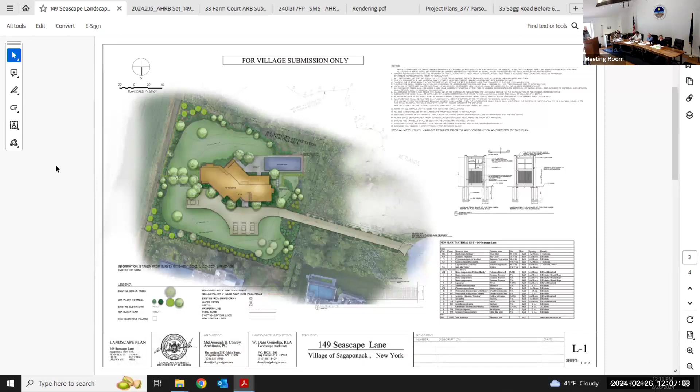So we revisited the design after comments from the board, trying to limit the square footage of the second floor a little bit more so we didn't have two-story boxy elements. We had to keep the flat roof design due to the flood zone restrictions on maximum building height. Everything's elevated. We have landscaping around the perimeter, which was meant to bring the grade focus to the first floor that's elevated. We changed a lot of the materials to limit the industrial look, which was a lot of the comments that were brought to us.

So now we're just using the one material, what is called Akoya Barnwood 2.0 Light Ivory.

Is that the sample there? I do not have a sample of that. It's in the mail right now, but I did send an email to Pat just now. I don't know if we could bring it up at all, if you want to see the color.

Yeah, we can handle something like that. Plus, you know what, if I can use your full address, do you want to try it? Sure. What's the village address? Sag Village at Gmail? No.

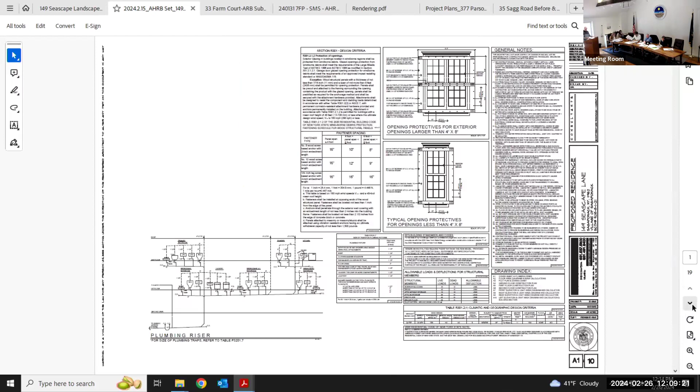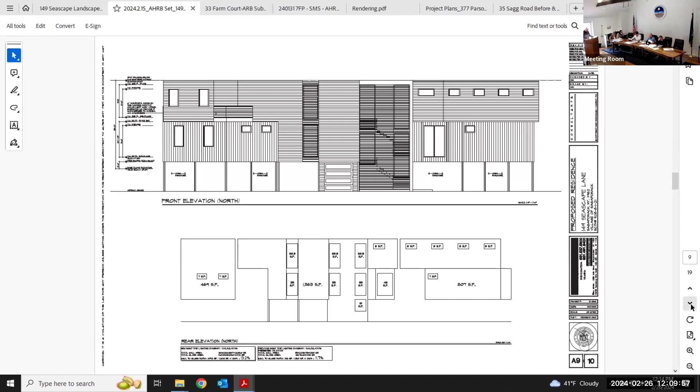I do think there's some improvement with the surface work you've done exterior. I am a little bit concerned about the exterior lighting and the amount of illumination of the siding in certain spots, and I would request maybe foot level lighting, recessed, so that you're not illuminating so much of the paneling at night. In particular, the rear elevation is pretty heavily illuminated at night. So if those could be step lights or something outside the doors, that would reduce a lot of that night illumination.

And we should all probably know this, but I don't - the second or third floor, those lights, are those requirement lights for egress or anything? They are required outside of any door leading to a balcony. Okay.

But like I said, if they were step lights, it would be a lot more modest, reflecting off of the materials. Yeah.

So the second floor, the changes that we've made in the back of the house, if you could see from elevation 3 that's on the screen right now - I stepped back the whole entire second floor so that it didn't have that box element. I had some recesses for the balcony for the one bedroom on the left side, and then just kind of trying to play with the elevation.

One of the other items that were brought up during the other hearings was about the glass railings we had before - we changed that all to cable railing.

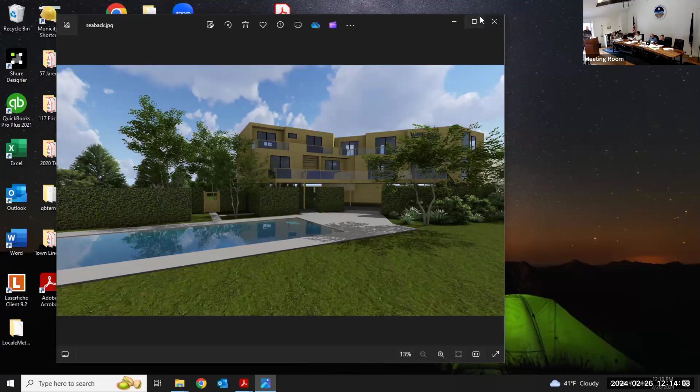Yes, so we do have other renderings from the landscape architect that show what the landscaping would really look like, instead of my renderer, which kind of tried to mimic a bit of that. I don't know if you want me to show you those. Yeah, they're on the screen now.

So we're using salt tolerant trees. We have Gleditsias, like locust trees, holly junipers, mountain grasses. I'm trying to keep this as natural as possible with all the indigenous vegetation in this landscape. On the back of the house, we have a privet hedge, a little tight, just to help mitigate the first floor being elevated.

And what are the second floor ceiling heights now? Second floor is 9 foot, and first floor is 10 foot. Interior ceilings or floor to roof? Interior.

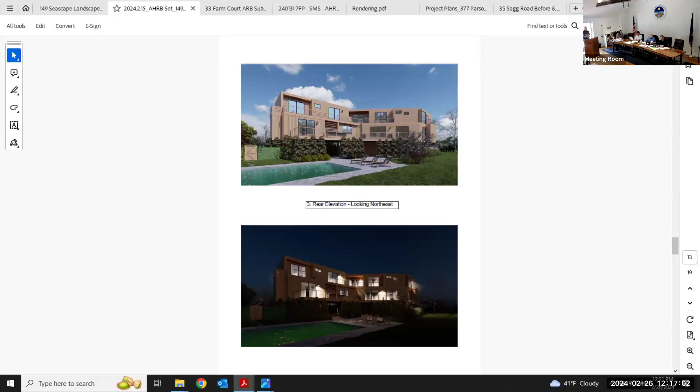And is it all the same monotone throughout? It's going to be the same material throughout. We did mix it up, if you want to go to the architectural renderings. We did introduce... so the first floor elements are going to be more of a vertical pattern, same material. And then the second floor, I made it all horizontal in those areas, except for elements that are two-story, like in the front right there.

And is the roof realistically that flat? There's nothing, like no mechanical, nothing's coming up? So no mechanicals on the roof at the moment. What we've decided is I have condensers - if you see in this image to the left, we have the same screening material over a flat portion that has condensers in that area, and there's also two more on the other side, and that's concealing the mechanical equipment so we don't have to put it on the roof. But going back, it's going to be a flat roof, more of a parapet detail. It does have a small pitch just because of drainage, but from the outside it's going to look straight flat.

Okay, thank you. And the color almost appears to be a peachy, orange, yellow kind of tone - is that the intent? It's more of a natural wood tone, not peachy. But would you agree that what we're seeing here is peachy, almost flesh colored? I mean, even between the two screens I feel there is a difference, but I think that's just the quality of the screen or the lighting.

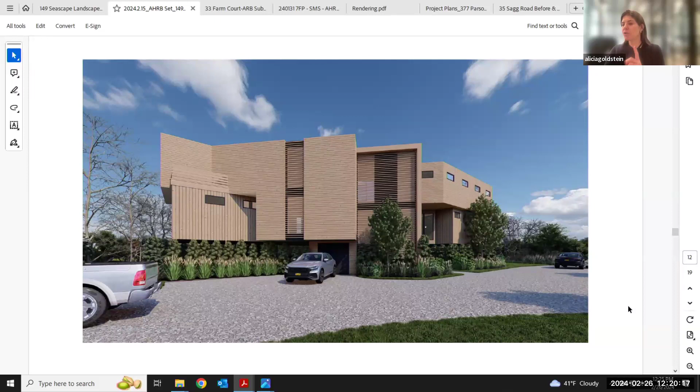Anything else, Alicia? No, I was just, well, maybe one other thing. I was just wondering, could you go back to the image of the back?

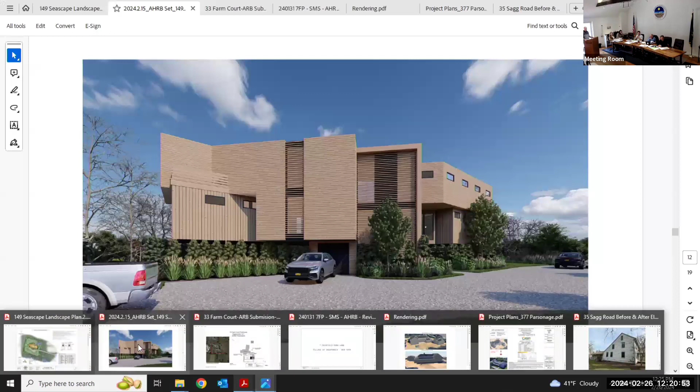You want to see it from the architectural? Well, I was just curious, before there was a stair that was coming down. Yes, on the right side, it was concealed, covered by the new plantings that are more prevalent in this illustration than in the plans we have on the table. But this is what you're going towards, not what we have in our packet, is that correct? For this planting, yes. Okay.

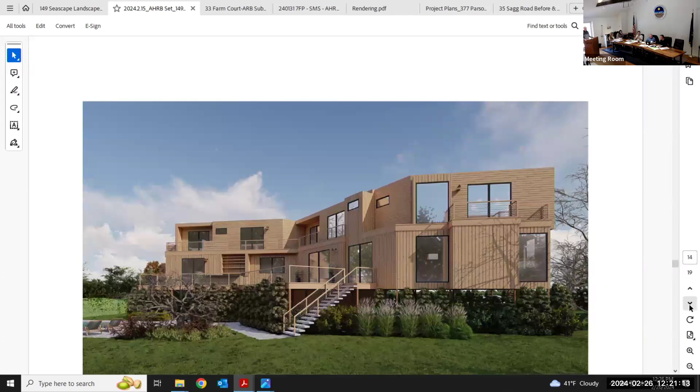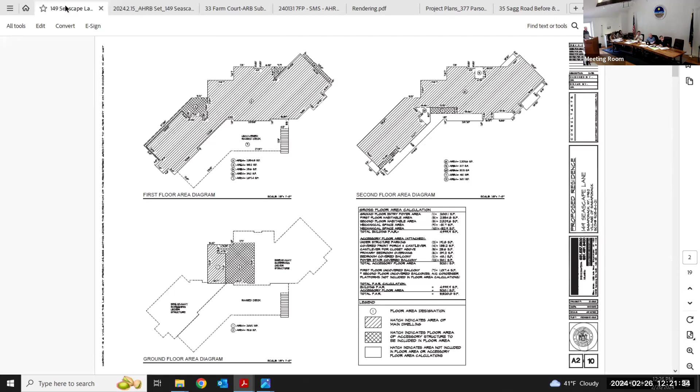Do we have an aerial? There's an area with the landscape, more of a landscape plan. But in that, can we go to that lower left and just zoom into that a little bit and keep it high on the screen.

So basically the ag reserve is just to the left and the Sagg Main is directly below. But this is a fair amount of distance in off the street.

This is the present layout, this is the existing structure. Is the pool in the same spot? The pool is in the same spot, we're keeping the pool where it is. Okay, all right, so the new structure will be north of the pool, or above the pool? It's still below, we're trying to maintain some of the certain angles of the existing.

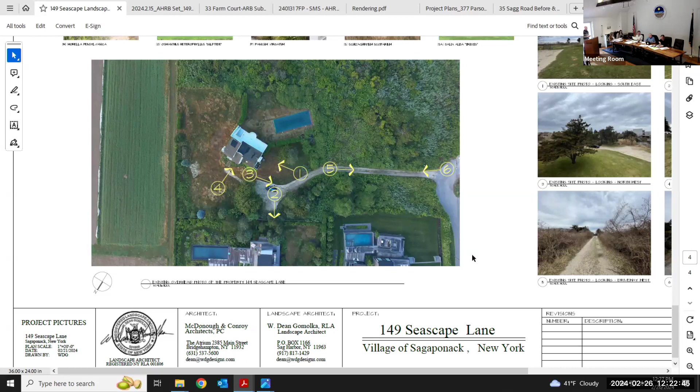If you could go to maybe the first sheet in that set. So existing, so the other part of the boomerang is parallel with the pool. Yep, alongside, if you see. Okay, all right, thank you.

So for me, I think it's the northeast or the rear elevation that's the most difficult to get my hands around. It just seems so many different kinds towards the pool. Okay, somehow from the front it is, I wouldn't say all resolved, but it's quieter. And there's so many shapes and chamfers and screens and decks with no openings to them, which I think you're trying to hide the condenser, right?

Correct. I think I might recommend just having the facade higher because it's odd to see a deck with nothing, there's no way to get to it.

I mean, it looks like, I don't know if I have the roof plan, but it looks like a dozen different shapes, is that about right? You have, right, so many different polygons and squares and rectangles all combined somehow.

So it's hard to, when it's quieter, it somehow makes sense. But then when you go to the northeast, that's where it all kind of devolves into a whole series of different openings, different sizes, and it's kind of hard to understand if it's a condo or if it's a, I don't know if you could speak to that a little bit. If you would go to the northeast rendering.

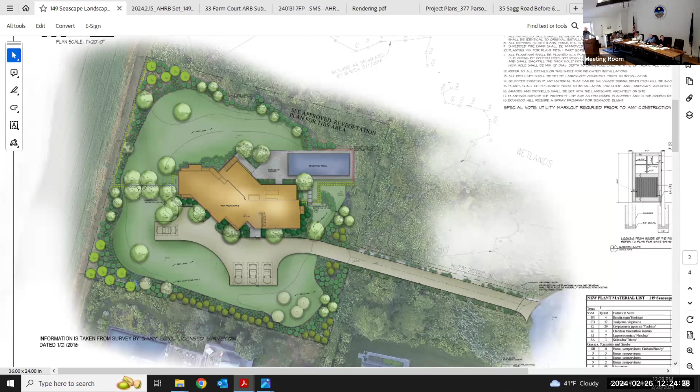Number 3, rear elevation. I mean, I can count almost a dozen different moves here. It just seems very complicated. Am I alone on this, or does anyone else want to weigh in?

No, I think the fact that the shapes are sort of, the second floor shapes are self-contained in the second floor, none of them sort of break the plane of the first to second floor, it does make it seem a little, I mean, I appreciate that you're trying to break up the monotony, because I think that's what scares me the most when you see these types of places. And a lot of it was driven by the

dimensions of the interior spaces also, minimum sizes for bedrooms on the second floor there. Yeah, we have the hallway in the front of the house, bedrooms are in the back, so we could maintain visual to the water. But you also have two different major rectangles, and both of them have chamfers, right?

So there's like a 45-degree angle.

And then a few have rectangular bits hanging off of them. Overall, it's a lot, and I wonder if there's a way to simplify it. The easiest thing I could think of is on the upper left, when you have the overhang, if that overhang could just continue over that whole facade. And similarly on the right, at least you'd be able to connect two separate rectangles, but it's just an idea. I know one of the first versions we had this continuous band going across.

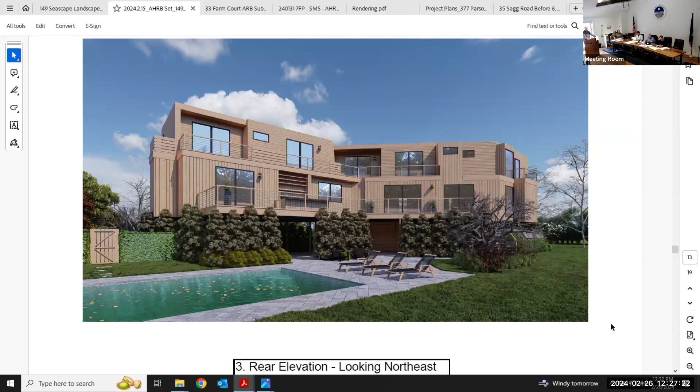The change of the windows was also more for reducing the amount of glass, and their bedrooms, bathrooms, so a lot of those windows are smaller. Just get a little light into those bathrooms, but it's not necessary to have them all the way down. Particularly in the night shot, you can see how it looks like just all kinds of different kinds of windows of light coming out.

So maybe thinking through functionality as opposed to just form and line.

Does get very complex. You know, in the 80s, there were a lot of, particularly in Westhampton, large scale houses that were kind of just all popped up without rhyme or reason. I think this northeast view has that kind of feel, while somehow the other elevations are more resolved. And I'm mostly concerned about what the public will see.

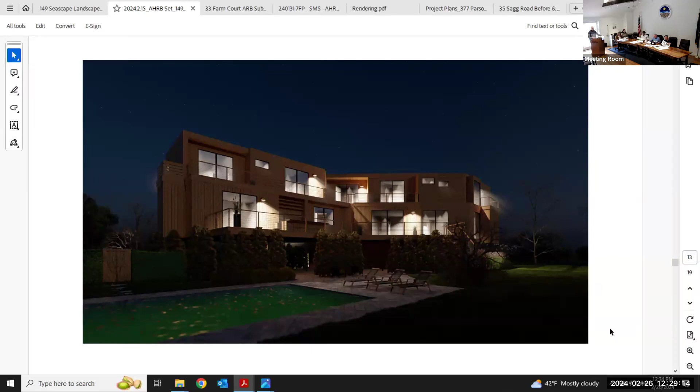Rika, any other thoughts? Any other thoughts on Nick's comments, or are you? Where are you with adjusting that? I think there need to be some next steps.

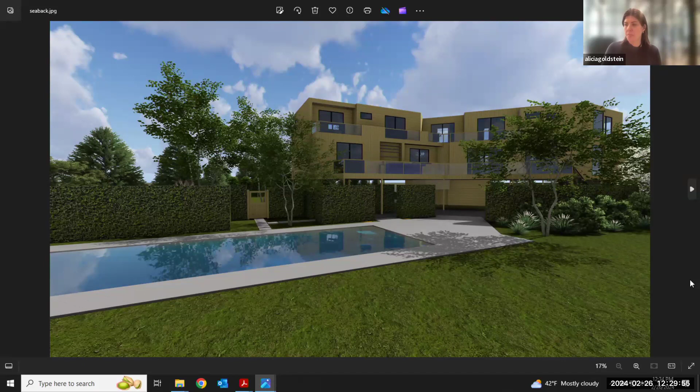Do you have any questions of us? Anything to clarify? I guess if you have any ideas on what's, 'cause I'm going to try to simplify the back elevation.

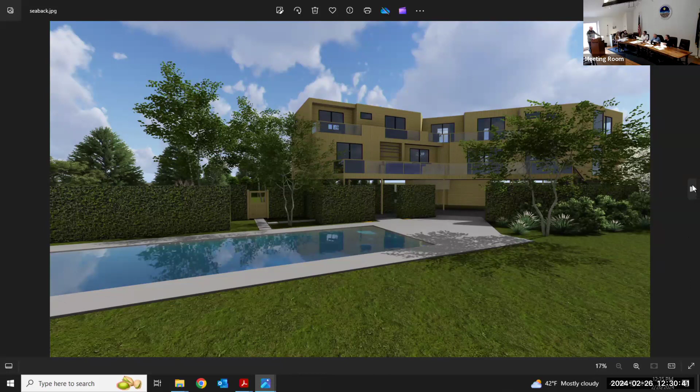The front elevation southwest. And again, particularly when these planes sort of transfer, cross between the first and second floor, it does sort of start to break things up. Even that horizontal vertical mix, if one's continued through the whole thing, it might look better.

So that element you like seeing. Yeah, kind of the idea of making the large space, and I appreciate that with the FEMA concern, a lot of needs on that second floor.

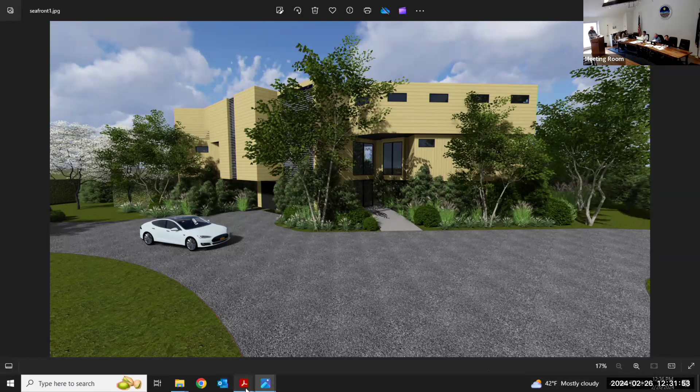But it's almost night and day. Normally the south has a lot of glass. And in your case, I don't know the percentages, I could look on the sheet, but if we look at the south rendering, there's extremely large spaces with no windows at all. That whole left portion of the entrance looks like a 15 by 28 foot, 30 foot space. And then there's two more of them beyond that.

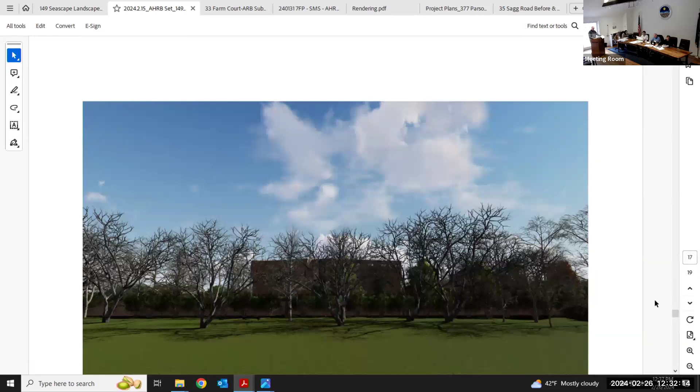So I think it just needs a kind of definitive hand to define spaces by type. And personally, I'm not sure having it all the same color is helping. These woods, we use them quite a bit. They come in different cuts and sizes and everything. I wonder if you want to play with some variety because it's starting to look very...

front and back. This is one way to say it.

On the northeast elevation to the right of the illustration, you have these kind of pop-out boxes in this area here. Is all of that absolutely necessary to the design, or are you struggling with it, was it lighting or... So it was more for introducing just like the fenestration type, pushing and pulling, having something sticking out. I could even make a cantilever a little bit.

That room is another bathroom. To have a decent sized bathroom for this area, I felt that I needed that extra space instead of taking it out of the footprint. But I could introduce other materials to it. I could have it cantilever. It could be a separate element.

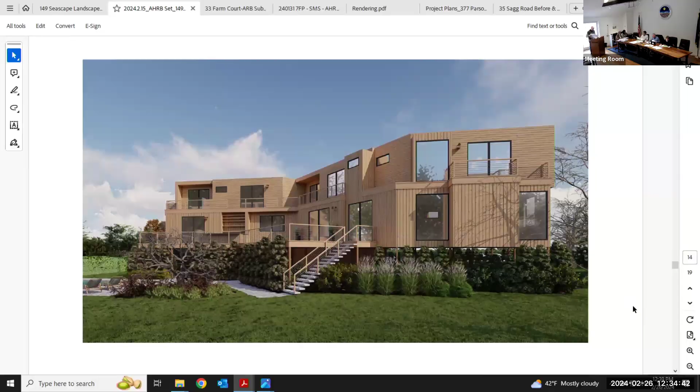And so these railings are all continuous on this deck? Yes, you could walk throughout that. And this would pop out, come all the way down this one. Yeah, but then you'd sort of interfere with the continuity of this element. Yeah, it's just very boxy. Segment it, maybe. Okay, thank you.

All right. Okay, there we go. All right, thank you.

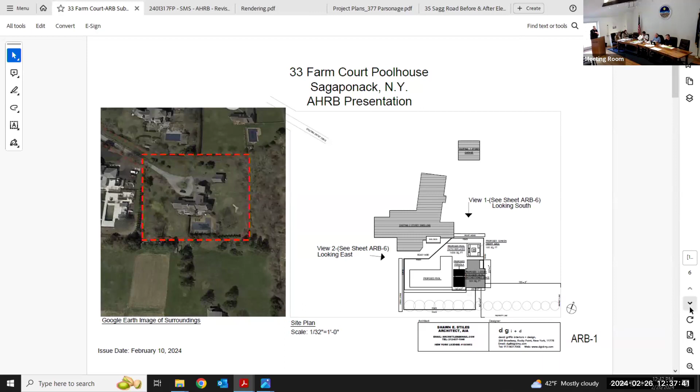David Griffin of David Griffin Interior Plus Design. The design is for a pool house in back of a main existing house. At the last review, there were some comments about the entry building, the little side entry that you go through to get to the main part of the pool house. It was shown as white.

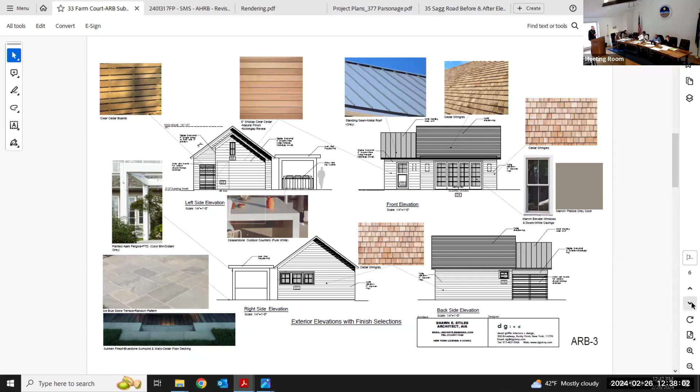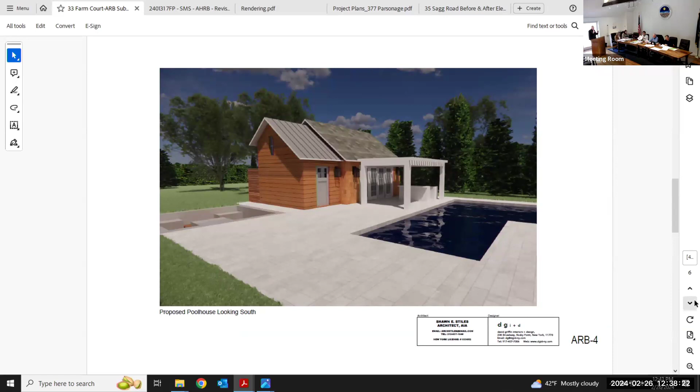I took some of the thoughts of the board. We thought maybe they wanted to study the white or see the white. I brought the white, but I actually changed that little entry to be a natural cedar. That was one of the suggestions. I think it actually looks really good. You'll see renderings of that. Sorry, it's a little orange but I do have samples of the white. And what I did do was change it, I kept the pergola the white color, distant white there, and then changed the outside boards to cedar.

The board also wanted, and that's the metal roof at the top, a little bit of the metal roof. The board also wanted to see photos of the existing pool house, which I have in there. Very good. Thank you.

There's a view of the back of the house and kind of the two exposures where people would possibly see the little structure in the back. In my last view there, I kind of show those views again with the future privet in place and how the building could be hidden.

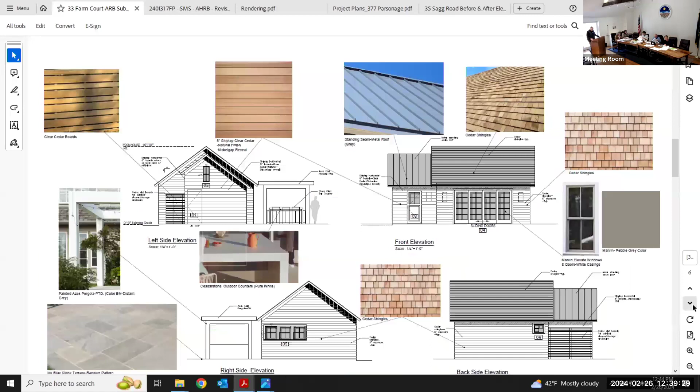I like the choice of sidings there. It seems to come together. And you know what, thinking about it, the inside is going to be the white shiplap board, so it'll be nice to be outside and see the cedar and then go in. Good. We'll go with that. Any comments?

Felicia, any comments? I'm good. Okay, I'm curious about the two different roof materials, if there's a thought to maybe keep them the same. I've gone back and forth, but part of the little entry piece where you go in is to give it a little contemporary flair, which is why I had shiplap and a whiteboard with the metal roof. And then when I put the cedar in, I still kept the reveal detail, which is a little bit more contemporary, so I thought it would be nice with a little offset of the metal roof there.

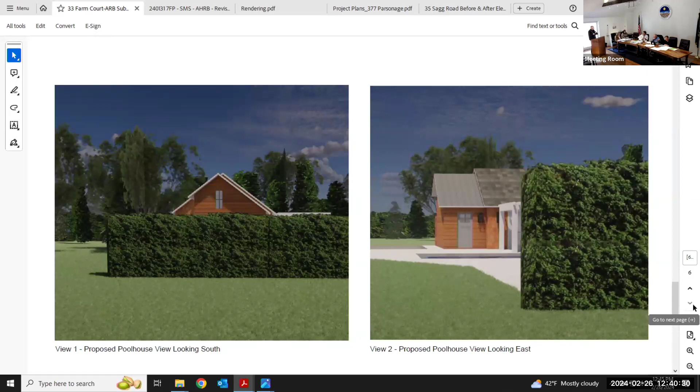I like it. I think it also follows the tradition of farmhouse, building a place and then getting a few more goats and then you add a little shed off the side of it. So, for example, goats, okay. And the furniture is gonna be a little contemporary, we haven't decided on all of it, but it's more like the way to see it.

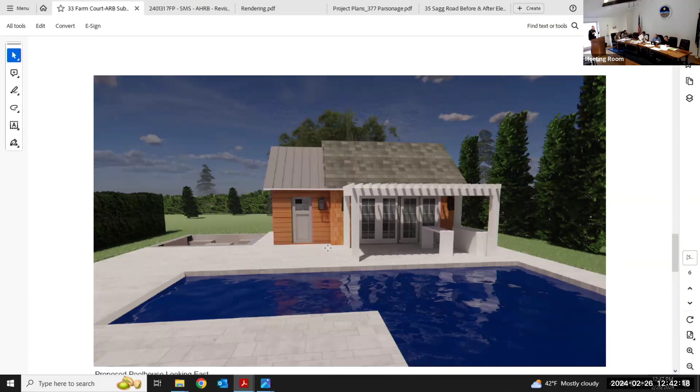Is it also gray? I'm just curious versus white. Yeah, so you'll see the windows have a putty color to them and that door matches. And same with the patio, it seems to have no trim around it either. At that door, no, because that has the shiplap board kind of coming in on the casing.

Tony, any comments? No, I think it's low height, it's got a contemporary corporate look the guy wants, but I don't think its location or overall height has a deleterious effect on the neighborhood at all.

Okay, is there a motion to approve? I guess after that statement, I'll make it. There's no way out of that one. Is there a second? Alicia, you want to second? I'll second. Okay, thank you. All those in favor? Aye. Opposed? Very good, thank you very much.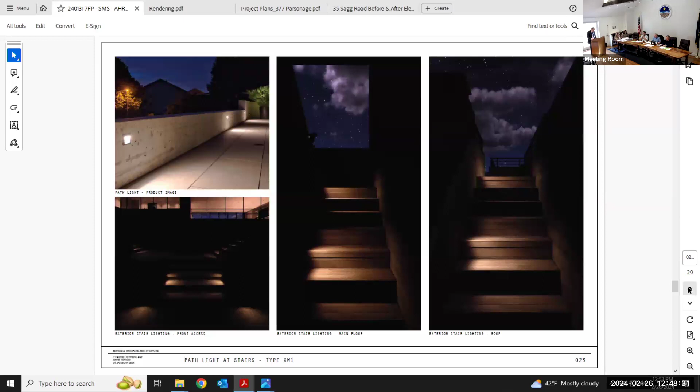I agree with that. It's hard to marry, obviously as you said, the site is big enough for the zoning, but with the sort of visual mass given the other properties, in my mind it almost sets it apart in an industrial sense.

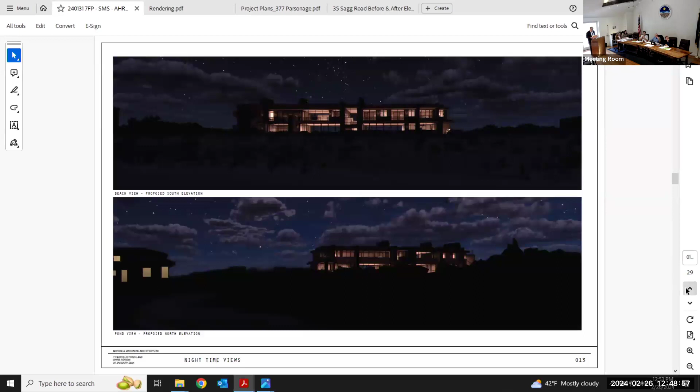Can you zoom in on that? The elevations is what I'm trying to get to. Thank you.

It's still a lot of glass, even though it's pulled down. I was trying to recall whether I was actually on the board back when it was approved or not. I may have been. I said I was trying to recall whether I was on the board in '09 when this was first approved. What year was it? It was in '09? Yeah. Wow, yeah.

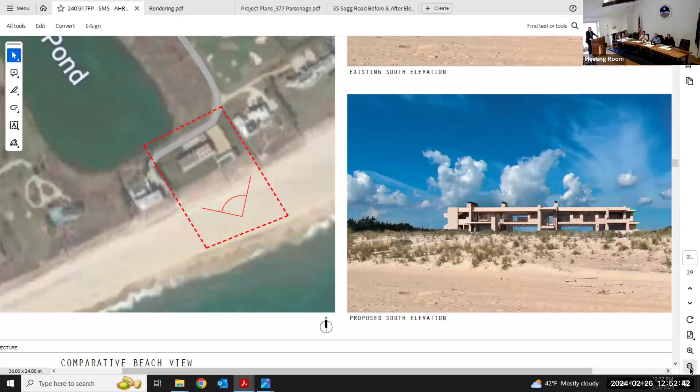Having said all of that, I think it's a significant reduction. Alan Russo from Mitchell Wickwire is here, I don't want to steal his show, but I think it's pretty clear that it's relative to what's there now. I think it's a vast improvement. I think we've tried to listen to the board and came in with a reduction of glazing. We're trying to be not only communicative, but cooperative with the board.

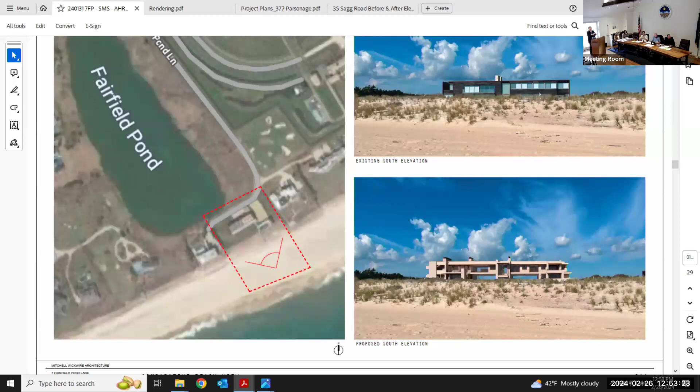If I may, it seemed at the last meeting, and again it ain't over till it's over, I get that, but at the last meeting it seemed that generally everyone was favorably disposed towards it. The only question, Chairman, you wanted everyone to go out and look at the property, and I get that. But I thought we had really worked hard to get this to a point of approval. The code doesn't say that you have to approve a house that subjectively is perfect for everybody. You're supposed to meet the standards, and I think we've really, really tried very hard to do that.

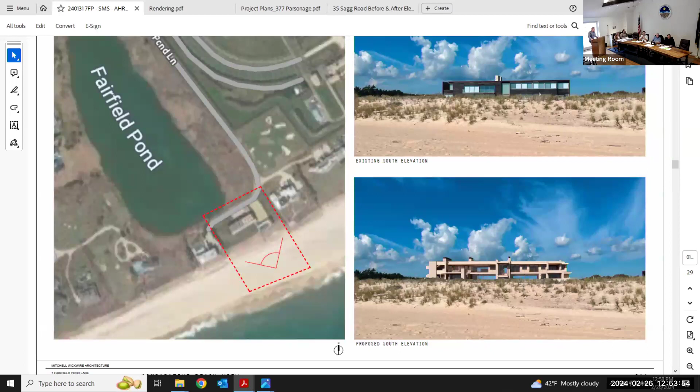Alan's here if you want to come up and see if we can answer any questions. I know we went through this all last time, so happy to just focus on it. Please introduce yourself. I'm Alan Russo with Mitchell Wickwire Architecture. Happy to answer any questions.

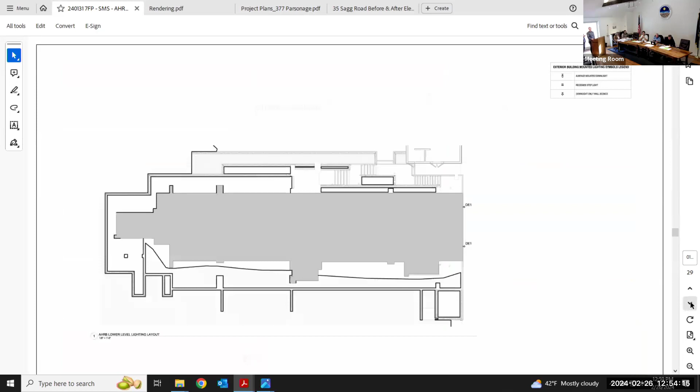The only addition was sheet 23 with the renders, just trying to show that the lighting is minimal and focused on safety. We're not trying to light up the facade, it's just for walking around. At the last meeting it wasn't clear whether or not the board wanted that, but I said give this to the board. So that's what we did, it's pretty minimal. That was the only addition from the previous package. Also have the samples if you want to re-review those or any other topics.

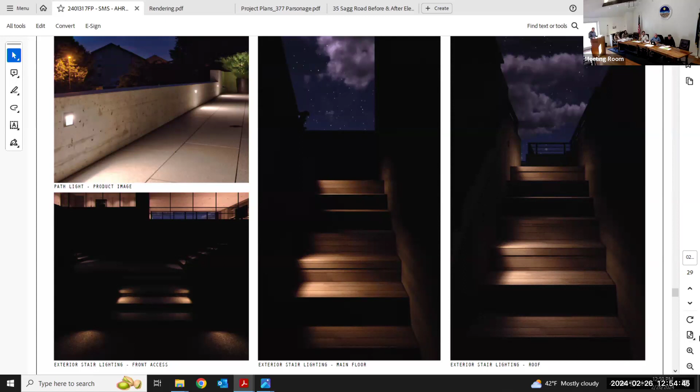Can we look at the north facing rendering? Sheet 9. Actually less glass there, purposely.

I think we all agreed it was aesthetically pleasing, and I understand what you're saying about the height and the requirement. It may be the protrusion of the vertical pieces that give it some interest, but also maybe that's adding to the chunky, more massive feeling of it. I don't know that there's something you can do about that, that's just an observation. I feel some of the mass, by breaking it up vertically, at least gives you some separation, some interest, and more fluidity, but maybe that's just what's happening.

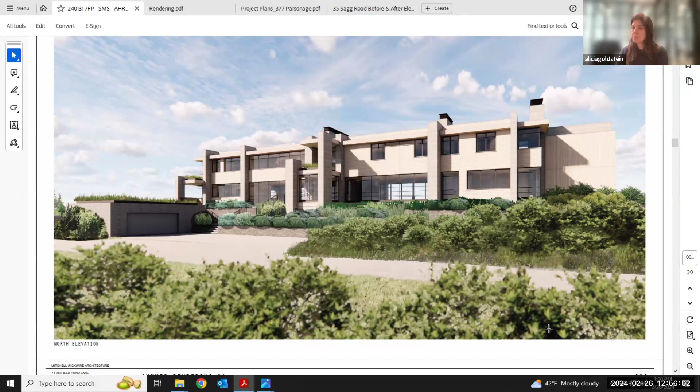To the extent that the village has struggled for years to try to figure out the sweet spot for FAR, GFA, a lot of that is driven by mass, so we clearly meet that. I don't think you can forget that one of the reasons the whole limitation based upon lot size came into the villages was they were concerned about mass. So obviously we conform with that.

Any other comments? So has the board approved it at this point, other than this elimination? I'm not sure, I encouraged the board to go visit the site. At this point I don't think it would be unanimous, but you can certainly pass on three votes.

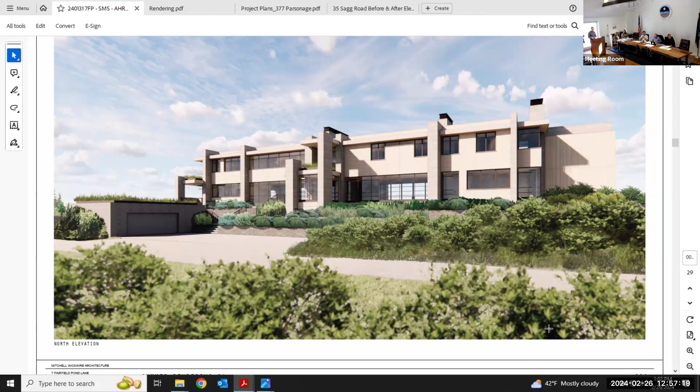We would ask you to do that. Can we see the south elevation? Yeah, that's the next page. So this is what's facing the ocean. Walkway to the ocean is bottom right.

You did say all 3 chimneys are functional? Functional mechanically, there's only 2 fireplaces in the project, but there's vents and exhaust. They're being used. Okay, there's also an attempt to bring more of the native plantings

into the property than is there now. So there's more of the beach grass type landscaping here. Yeah, there's a surprising amount of lawn on the existing site. Might just be mowed beach grass.

But this in the winter time though, right, in the other couple seasons, right now for example there wouldn't be anything to see. It's not green, there's nothing, there'd be nothing visible at the house. There's no winter growth, there's no coniferous plantings of any kind.

A little bit on the sides, but are those shad trees though? I'm sorry, are those shad trees? What are those depicted as? I don't know the species. They're like shad trees, which are there.

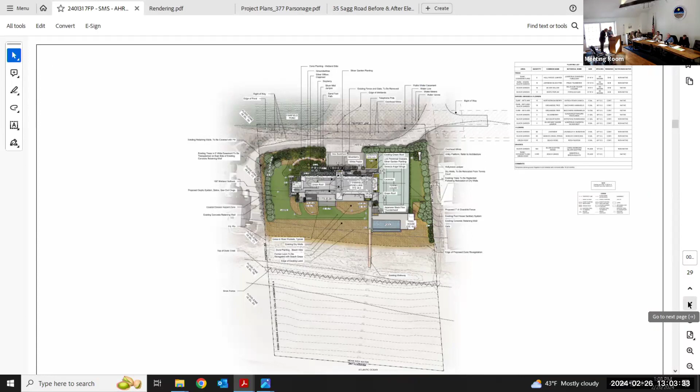14 and 15 have the unrendered versions. You wanted to see the east? East and west, well, it's 14 and 15 on the top of the elevations. Can we put those in front of you? Oh, they're there, right there. So that's the east on top, that's from the tennis court, that's existing. And then that's the west, on top of that.

So there are no color renderings of either side, is that correct? That is correct. But the palette doesn't change, it's all the same. And what is the reduction in glass?

Oh, let me go through that. All I'm doing is cribbing from the last presentation. Let's see, I'm so sorry. The east elevation, the existing there's not much of a reduction there. The east elevation is 13.49, the proposed is 13.45, but still 13.5%.

North elevation, the existing was 43.38, the proposed is 31.39. The west elevation, the existing was 16.85, the proposed is 13.89. And the south elevation, we're at 51.91, and the proposed is 41.66. Of course, that's the ocean front, where you're trying to capture the views.

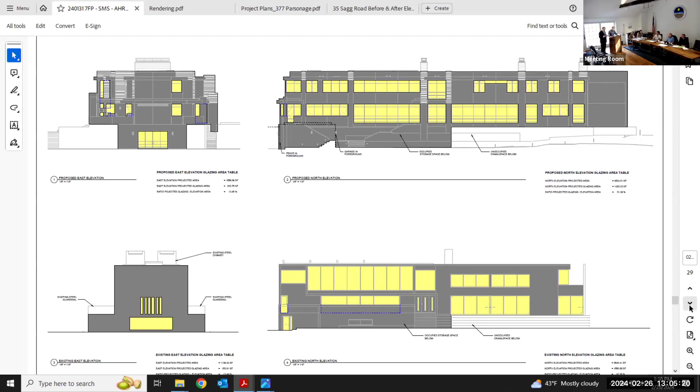Is that in just square footage, or is it reduction via the glass quality? Those too? They are percentages. Percentages of the glass reduction. So you have 13%, 31%, 13%, 41%.

Was this emission glass or not? I'm sorry? Is it tinted glass? No. Or energy efficient glass that would be reducing emission at all? It is currently low iron, low E.

I think Tom's trying to speak of the glass that reduces the emission of light through it. There's energy efficient glass, which actually lowers a slight amount of its light emissions, percentage up to 25%. I don't think so, I think it's just U.32 low iron glass. That's the intent.

Is there a willingness towards moving if we went to ask for that, some sort of different type of glass? We'll certainly consider it.

I'm unfamiliar with exactly what you're referring to, but candidly, I'm trying to see if there could be some sort of approval for the house to stay. So if you say we'll consider it, we're coming back because the board is going to say considering is one thing, agreeing is the other. Is that fair to say?

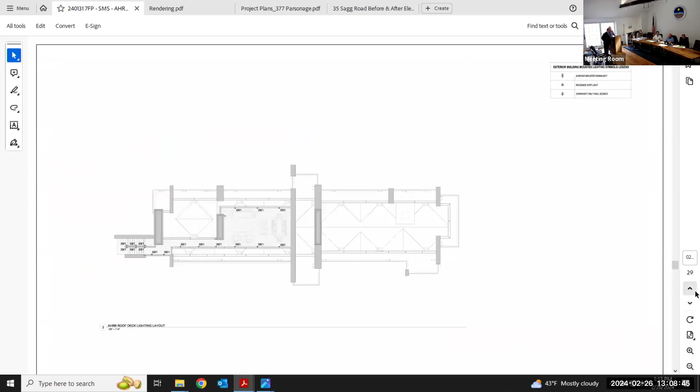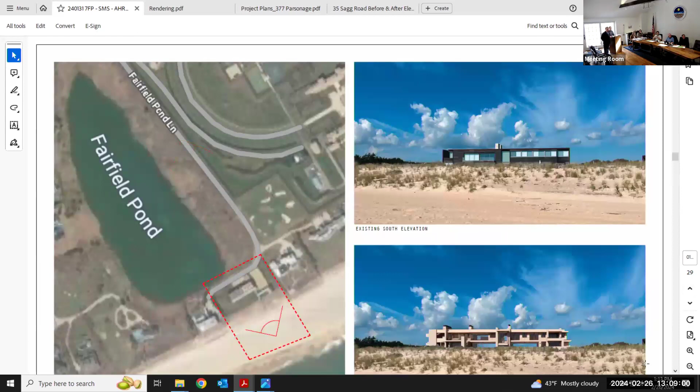And I'm trying to, in my mind, it would be nice to figure out how to make it fit in. I'm not sure it fit in when it got the CO in 2011, to be honest. But like I say, I don't really recall this particular setting, it's a different house. I understand, yeah, it is, exactly.

Would the glass be enough to, just very directly, sway the other board members? As we've been, this comes out of left field, to be honest with you.

The last time we were here, the board was quite supportive. And Tom, you wanted everyone to go down and take a look at it, but I don't know that, the houses there are close and tight together. There's no way of getting around that. But you know, that's what the zoning allows us to do, and we're trying to be accommodative to everything, but

Like I said earlier, if you can get three positives out of this, it's fine. You've got an improvement. Well, quite frankly, do we have that?

I don't know, I can put it up for a motion. We can, why don't we just continue? I'm sorry to interject. No, go ahead. Normal process is to go through the questions from each of the board members. I don't think we've finished that. I understand you're in a rush, we're all in a rush. I'm not in a rush, Nick. Let's just be clear, each of us have not had our time yet to speak on each of these points. Let us please do that, and then we'll do our voting. Okay, if you don't mind.

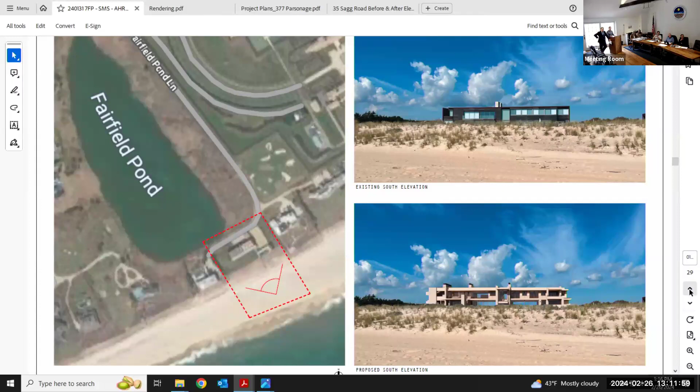Could you go to the elevations, the drawing elevations, not the rendering? I think it'd be the easiest way to see it. 24, 25. Actually, I think, Tom, also it's the east and the west sides that, just visually, it's a different feeling because it protrudes out. Can you remind me the length of the house? That's a good question. Compared to the prior, so it's not just the east and it's not just the south and the north, but it's the east and the west that really jut out on either side, so it gives it a sense of length.

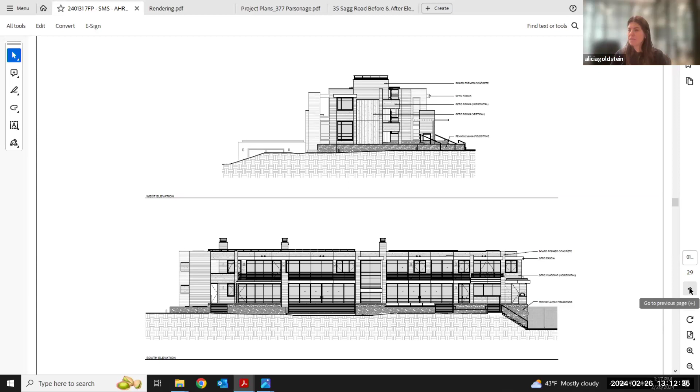I think there's an honesty to the CAD drawings, so I think we could try to be clear. There's some very positive things that have happened in the transition in this project. I don't know if it's completely resolved in my eye, but they've reduced the glass. They've made the material softer, even though they're very hard materials. They're lighter materials, they're non-reflective, all these materials, correct?

Correct. I think the landscaping needs some resolution. I personally would require at least the second floor to have less light-emitting glass. In today's application, I don't think we'd accept so much percentage of glass to the elevation in general. Yeah.

The breakup or punctuation of these vertical elements is definitely a way to break up the mass, but do you have that elevation? What is the length of the building? I actually don't know offhand. The length in plan - if you go to sheet 3, there's a survey. I apologize, that's not the number I memorized. Do you have it to scale on the survey? If you could, yeah, we can just zoom in.

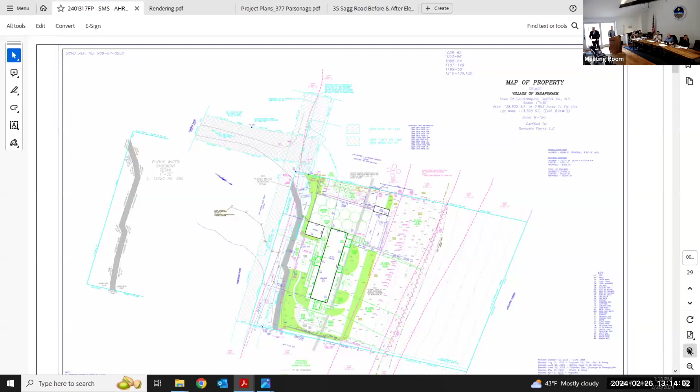There might be a... zoom in. I can't do that. If I can do it again. The first floor elevations, I'm assuming this run is 138 feet. Yeah, I was gonna say 150, but yeah, this is 130 plus. Is that measuring though to the end of those protruding sections?

It's exterior wall to exterior wall as required. No, am I missing something? Yeah, there's an addition on the west. Yeah, there's mechanical space, so I'll say the light green, so 150. 150, yeah, but that doesn't protrude out past this black line, does it? The course that I'm seeing, the surveyor's course, running along this black line is 136.8 feet. This is the addition. Oh, I'm sorry. So it's another 20 feet. Oh okay, just call it 150 feet.

I guess the point is, what is our mind's eye? What is the scale of a typical house? And it's very difficult to break up. It's a rectangle - no matter how you shake it, it's a rectangle. So they've added these elements to try to aid it, but it's still a 150 foot rectangle.

Well, the other thing to keep in mind is, as I said before, the unfortunate thing of having to design more and more to regulations is that it's squeezed in between some very restrictive environmental setbacks on both the south and the north, of course - you have Fairfield Pond. So if this was a farm field lot, you would do something that wasn't quite as linear. I think that's the very point I'm after, is that you have a set condition. I have 150 feet, and it's all linear, with no setbacks other than in these protrusions. No, but you can't operate in a vacuum - the board has to be sympathetic to the other restrictions that have been placed upon the lot.

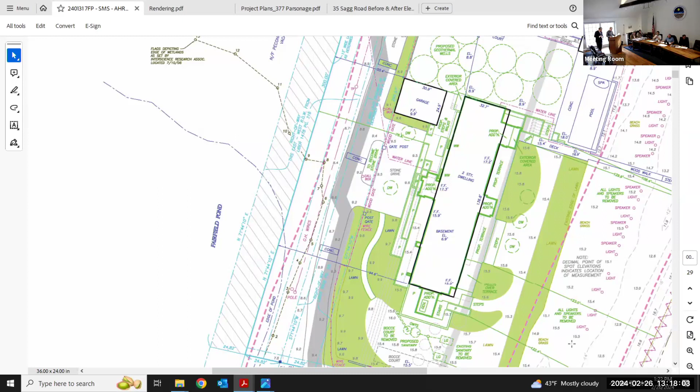It's usually on the survey. No, he's asking about the glass area. Oh, I'm sorry. We'd have to add them together. 222 plus 1420 plus 1701 plus 181. Maybe a lot better, for sure. 3,600 - 3,600 feet of glass.

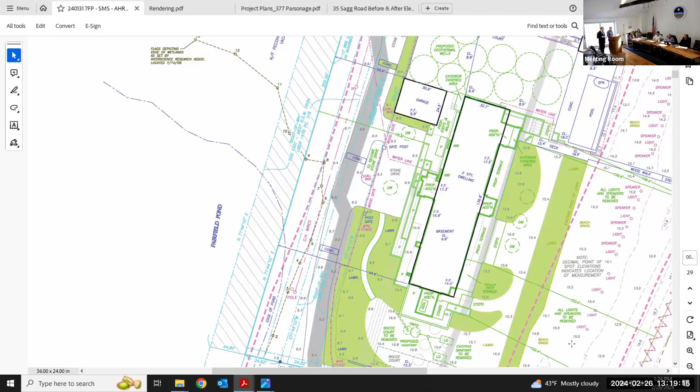Versus 3,000. It's just mind-boggling to a typical residential owner how this even happens in this world, that a $50 million house gets purchased and roughly torn down, rebuilt within 10 years, and is offering a 3,000 square foot glass package. How do we as mortals manage that? How does someone walking down the beach understand how architecture stands as a scale meter with 3,000 square feet of glass? So our role here is simply to try to reduce as much of it as we can, while allowing the architect to have his freedoms.

And it seems to me that I personally would require some kind of low light-emitting glass as a partial resolution, at least on my vote. Just in terms of, the problem is structurally the house, the materials that were chosen simply did not hold up to the elements.

Right, but I'm not complaining about the material. No, I just wanted to let you know, you're saying oh my gosh, it's a 10-year-old house - I was trying to let you know, I know the previous owner, the previous architect, the previous builder, I know the story, I know exactly what you're dealing with, and I know a fair amount about the house. I'm only trying to get this moving along.

Okay, well let's talk about the glass - the actual material of the glass. I understand where Nick is going, and I think the chairman's going there as well. If it's something that can be done without too much violence to the owner's design, I would say we have that discussion. Do you have a particular product? Oh we do, we have a few that have been applied to, we can help you with.

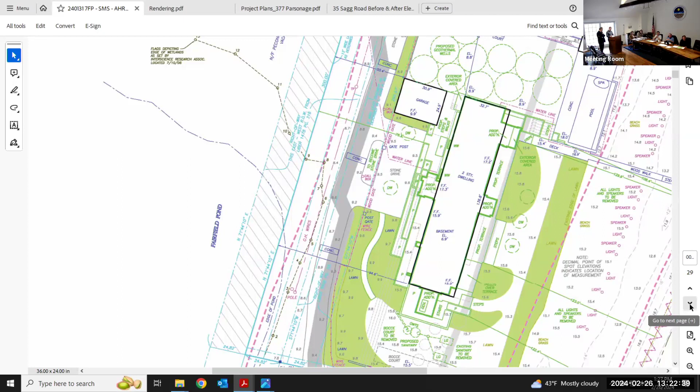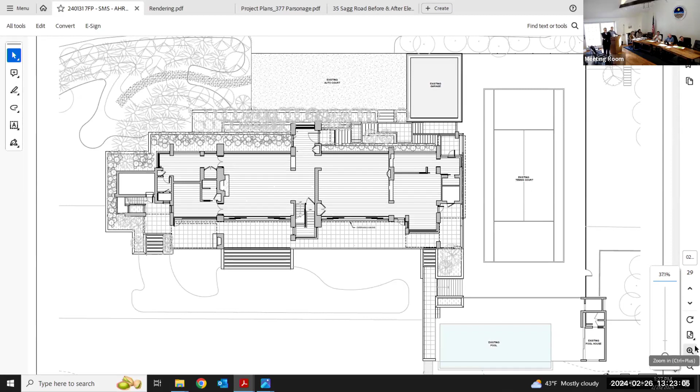I think we're open to modifying how far they protrude from the side. Can you show us a plan first? They're all different plans, okay. But if you just go to a basic floor plan on page 27 - there you go. You can see they don't all quite align, and there's a bit of a rhythm to them, but...

The dimensions of them on the north side, I think, could be tweaked. On the south side it would be trickier. What kind of projections are they in terms of just feet? They vary, from a couple inches to about 3 feet. We'll look at that, we can definitely do that. More on the north than the south. Okay, if you'll consider that. So we're going to consider the projections.

We'd love to have any help we could get in terms of the type of glass, and we'll get you a landscape plan. I hear what you're trying to do there, we'll see what we can do with that. Hopefully the topography is our friend a little bit too.

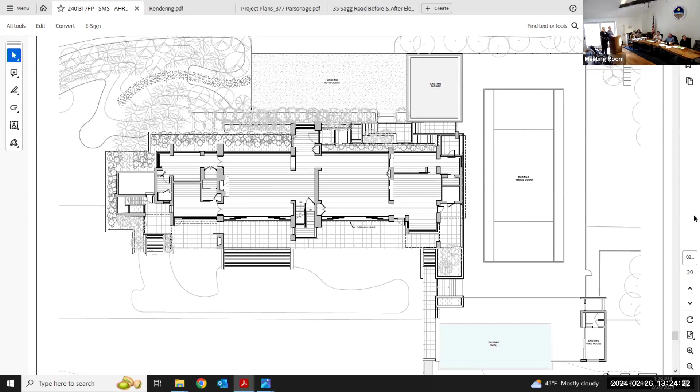Can we just see the south side again with the chimneys? Are they all the same height? Yeah. And they're all the same axis? They are. So there's really only 3 chimneys, the dark ones. Would it help to undulate them? Would breaking up the roof line be enough, you think?

I just wonder, if they varied a little bit, whether they'd be a little less monotonous. I think they're important for the elevation, but somehow having the 3 of them feels quite commercial. It's a totally different aspect of architecture, but I can't help thinking of all those Lutyens houses with all those large, even chimneys. Not that that's the style we're doing here, though.

If you want some variation, I guess we should look at that. Is that where you'd like us to focus? Well, I'm just trying to break it up. You know, if you go on vacation to any developed seaside, they have this kind of rhythm of large scale mechanical spaces or chimneys, and it really looks like a hotel. For most humans, they're not living in a house of this scale, so the more we can make it look less commercial, the better.

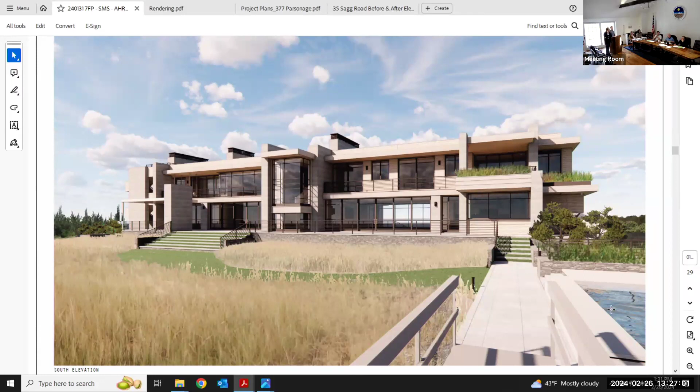Do you know what it does to the color? Does it change the color, and does it change the look from the inside? It's like putting on sunglasses, or like transition glasses, it slowly changes the amount of light getting through. It's not changing what you're seeing on the outside from the inside and outside. Natural light is so much more powerful by lumens than anything interior that it restricts the exterior illumination of artificial light going out, so the inside light's barely detectable. There's probably some made for tropical climates that are really tinted that we wouldn't ask for, but I was surprised going into a place.

Do you remember any of the projects? I'm just trying to give you what you want. Yeah, we can look into that and pick out a couple. John, do you want to let me know? Sure. Okay, all right, well that's good. Thanks, that's helpful, all of it.

Can we ask about the landscape screening? You're looking for more of a screening of the house. Well, it's such a large scale house, and you have literally no landscaping other than native grasses, which by end of September, October end up being dead. So it would be nice to have something that breaks up the form of this very large scale house with some kind of plantings. I'd imagine you want some shade from the plants too, but 150 feet of nothing but grass is a bit bold.

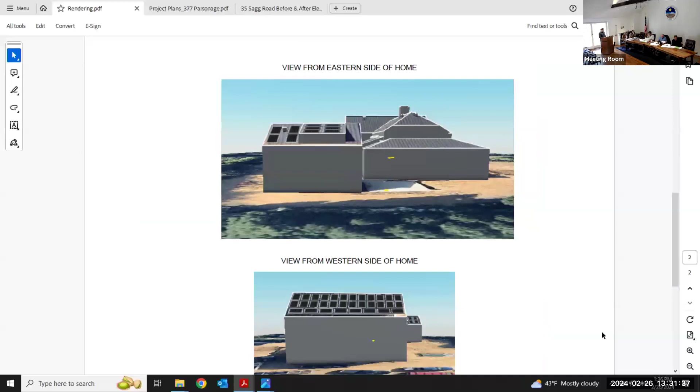They are island arrays, so there will be no conduit showings on any of the roofs or down the sides of the house. All the wires will be internally run.

Although this is a relatively off the beaten path site, it strikes me as a heck of a lot of panels, so it would help the board to understand who's getting to look at this. What I was going to request is if you could get a drone observation point from the height of your installation and give us a few photographs of who's being exposed to this, it would be helpful for us to do our due diligence for the public's concern on this.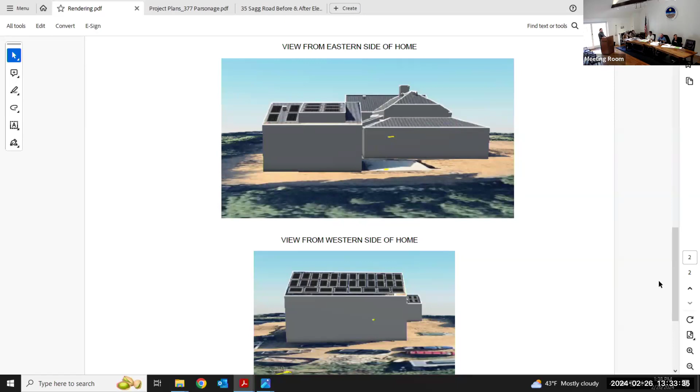The big question is, what is that neighbor saying? Yeah, so if we could request that drone observation of who's getting exposed to this, we can. Also, the edge of it, as you're approaching, would you see it from the driveway, the edge of that gable roof? I think so. As you're driving down the long driveway from the street, you will see that right side of the house, the edge. Then as you pull into the front and the driveway of the garage, you won't see it. Is this part of a larger renovation or is it a full project?

Yeah, there's a lot going on right now. Have they built the roof yet? They built the roof, yeah. A lot of places will channel in these solar panels so you don't have that sort of relief protrusion from the side.

Meaning like an over, like... No, just sort of turning off the inset - the panels will be inset into the roof itself. Oh, no, yeah, so they'll be flush mounted, but that's about 6 inches off.

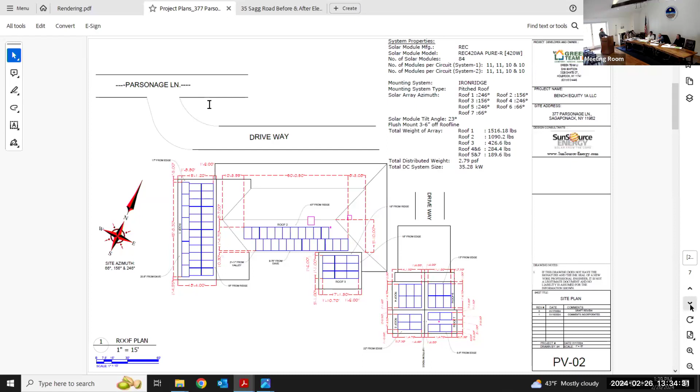Do you have any detail of how you manage that? Do you actually see the space between the top of the roof and the panel? Or do you clip on a side element of material to hide it? How do you manage that? So if you're standing at a certain angle, yes, you can see completely under.

They do have raised skirts that can go on the front or around the edges. That's not something the client offered, accepted, or requested. He may come around, or they may come around. There's a lot of aftermarket things in solar, like critter guards and skirts, more aesthetics than practical, but - critter guard sounds pretty important to me.

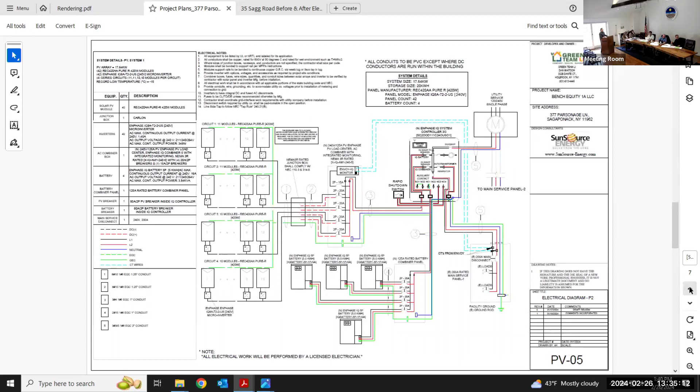No, critter guards, yes. Could we see the house in relation to the neighbor? I think the one to the west. I could go to Google.

I mean, this doesn't give us all that we need, we can see it's not... it's a long driveway, but there's neighbors right next to you. There's a lot of nearby things.

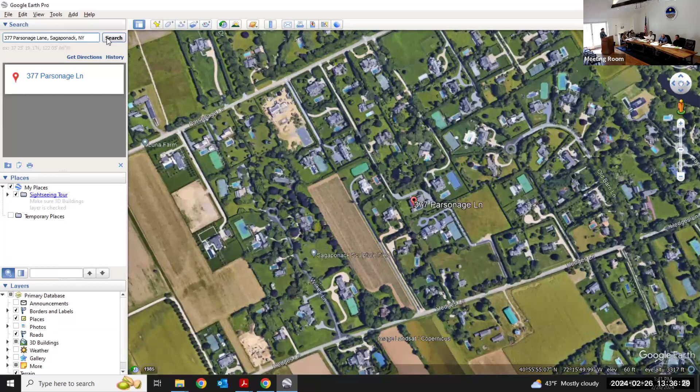May I ask a question? Is there any comparable solar roofing of this magnitude in Sagaponack? I just haven't seen it before, or this much of it. I don't believe so, no.

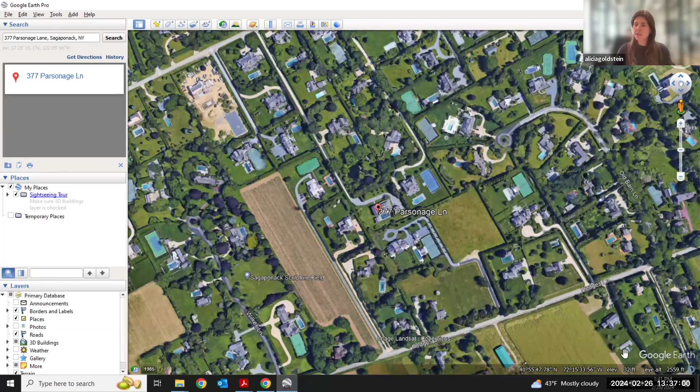I mean, it's ostensibly a good thing, right? I'm just, it seems like a lot. I don't know, I think he could have used more. Really? For his proposed offset, for what we anticipate his usage to be. Yeah.

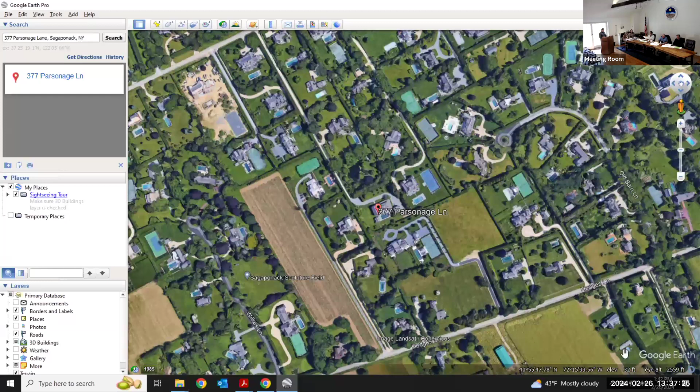But we did have panels on the opposite roof, the one roof you mentioned coming in from the driveway, and you can see that gable on the other side - you can see that from the front of the house, so we removed those. It was more visible from the backyard area. If you didn't want to see it, you can see panels from the backyard anyway. But we ended up removing panels there.

And is the goal just energy efficiency? Is there any other goal in mind? Is there a certification or something? I'm just curious.

His main concern was energy efficiency. As far as certifications, I'm not sure, it might not be applicable here. I'm just curious. Yeah, I mean, it's more of a commercial thing.

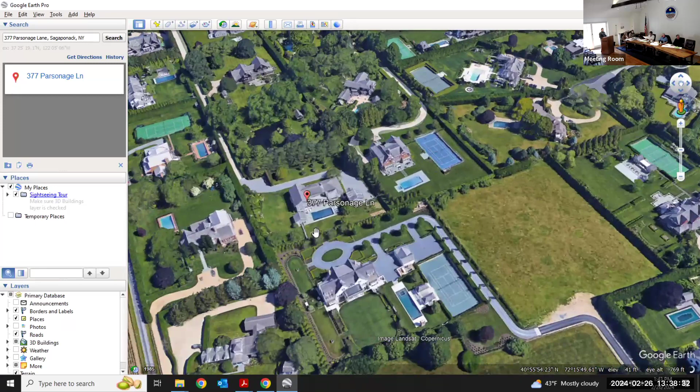Can you zoom in on that? And can you look to the left a little bit at the neighbor's window? Can you use that tool, the circle, the second circle down - yeah, and the other side of the circle, there we go. If you zoom over the pool and hit that button, I just want to see if that house has windows facing. Can you spin the whole picture around to see if you zoom in closer, like over the pool? Keep going. Right now, that's good.

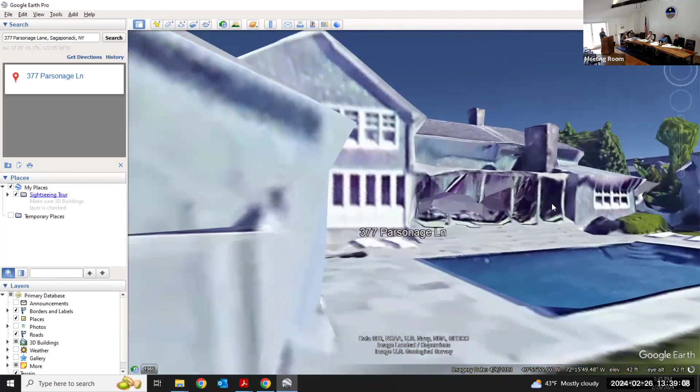Right, okay, you have to exit there. And I do the top one, I think you can rotate - yeah, the second button. So go ahead, just hand down. Yes, hand down.

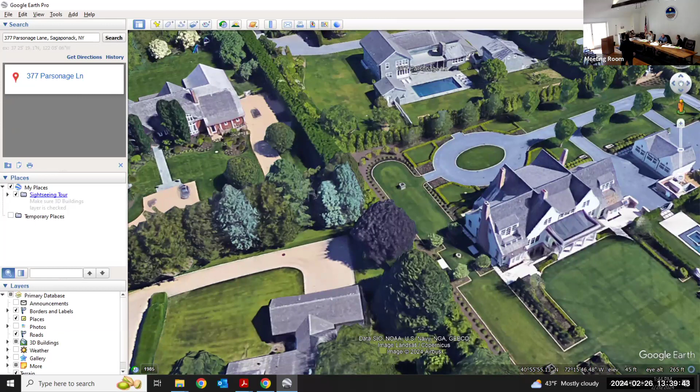I think we're looking to spin this way to see if there's windows on this side of the roof. That's right. And how would I do that? I think the top one, that top outer circle. There you go, ah, nice, thank you. Like flying. Yeah, so that's the question - are they able to see it? I think the answer is yes.

I think in that roof line, some of it is so extensive that maybe we should look into some sort of fascia or some way to show how it could be hidden, because it would cover the entire volume of the roof. I think we've gone beyond just tucking stuff in and more about raising something up to hide it, and I think how it's finished is important, so it doesn't look mechanical. Are we talking adding construction, like from the gutter line up, to cover it? Yeah, the skirts, I think you call them.

So the skirts, if I can clarify, go on the edge of the panel and down towards the roof line. They don't block the view of the panels from a neighbor. I want to be sure - the roof is the table, and the panel is elevated 6 inches above. Does the skirt hide the break between the two? Yeah, on the low end. I'd want to see that.

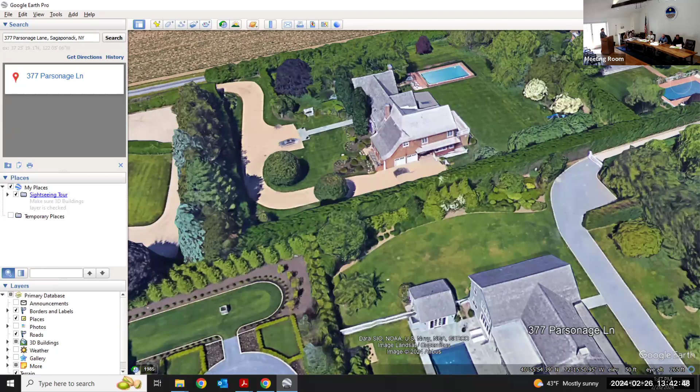John, have you seen this extensive paneling for a residential house, or is it on the higher side? That would be the highest side of any house we have with a solar panel - we're talking surplus, panic room surplus kind of thing. It's 35 kilowatts, seems a little doomsday preppy. The client has used that term, yeah. He doesn't think we're there yet, but we do.

And with a 40 kilowatt hour backup system, it's good to go. We can have a party in Armageddon. You'll see an orange extension cord going from Sagg Main Street.

Do you have any other questions or concerns? All the panels are the same color. Yep, they're all the same. The options are either all black, which is what we usually install, or the back sheet can be a different color, mainly white, but then you see black squares of the panels, which I don't find as pleasing. All black frame is usually good, and we have flush mid clamps and end clamps so you don't see anything protruding between or at the edges of the panels.

Has Elon Musk given up on those terracotta, slate-looking single panel tiles? Yeah, I've seen a few - he's busy. It's not that the technology doesn't work, it just makes more sense production-wise per square foot to get a panel. Then you need Tesla to redo your roof or fix anything - you don't have a roof contractor, you have Tesla. That doesn't sound fun.

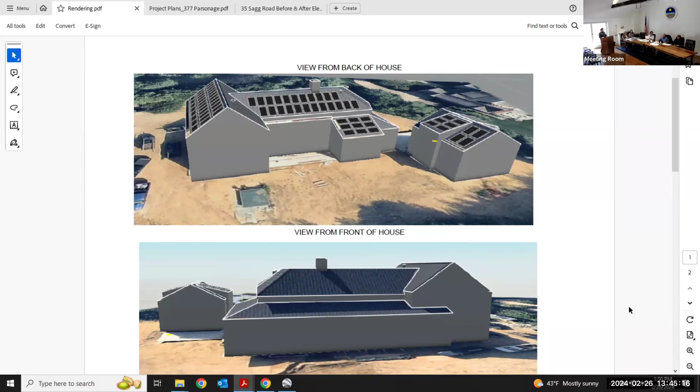You want to know too if the panels are reflective. And I'd also like to be able to look at the drone shots. So let's adjourn and revisit it, especially as it's one of the largest solar installations - I think it deserves a little bit of corporate attention.